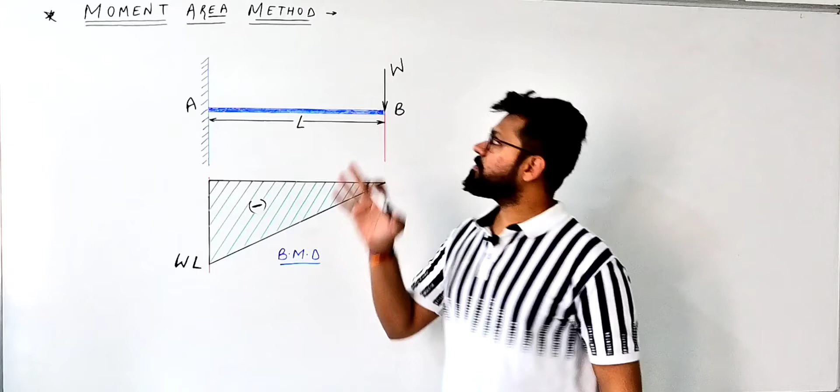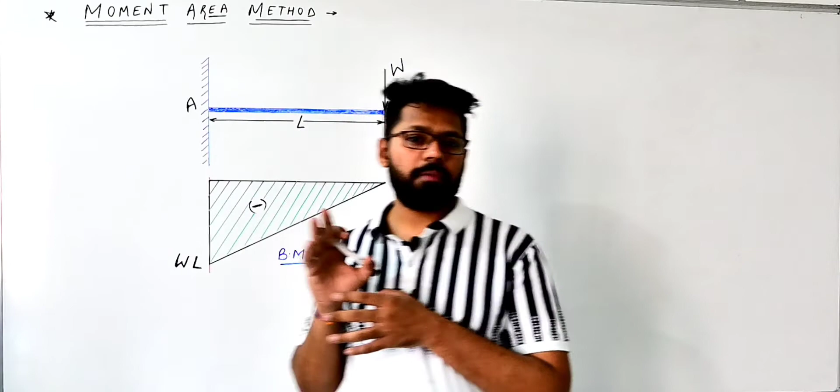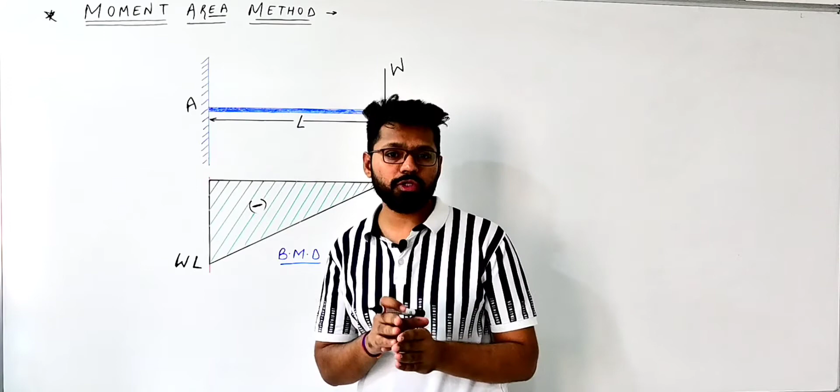I will explain you moment area method, deflection of beams. In deflection of beams, one topic is there, that is moment area method, and this method is very useful to find deflection. Any type of beam, we can find the deflection from moment area method. This is the best method in deflection of beams, and you can approach so many difficult questions from moment area method in an easiest manner.

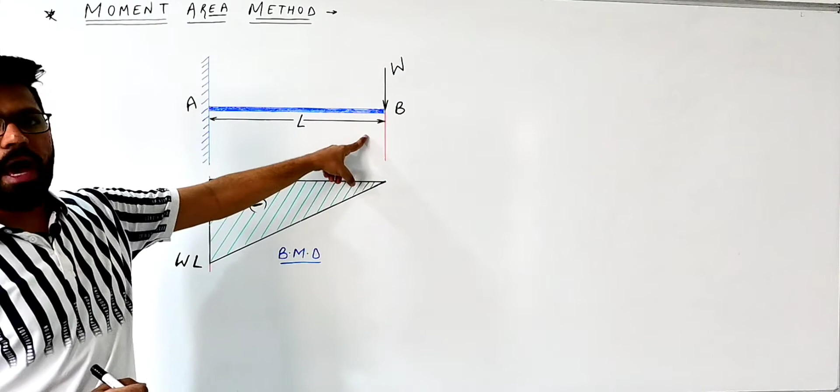Okay students, so we'll start from here. This is our cantilever beam, total span is L, and W is the point load acting at the free end of the cantilever beam. This is cantilever beam which is fixed at one end and free at the other end.

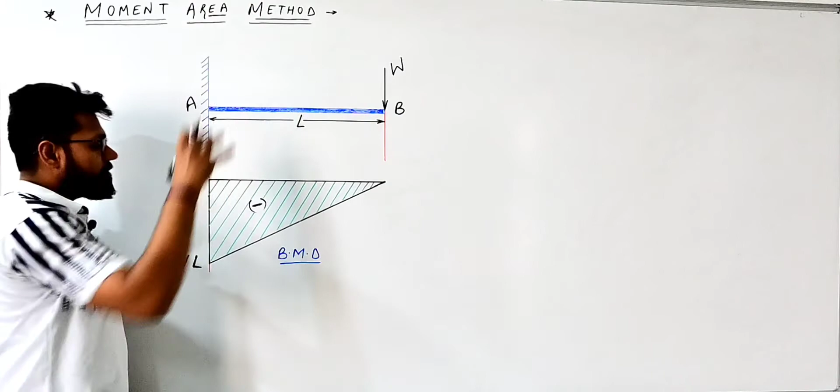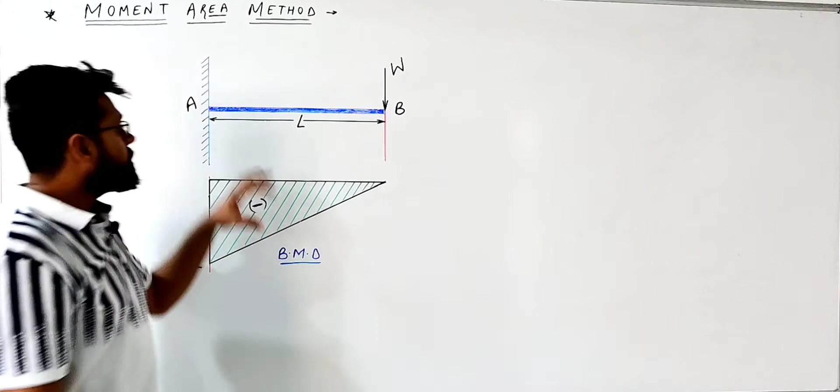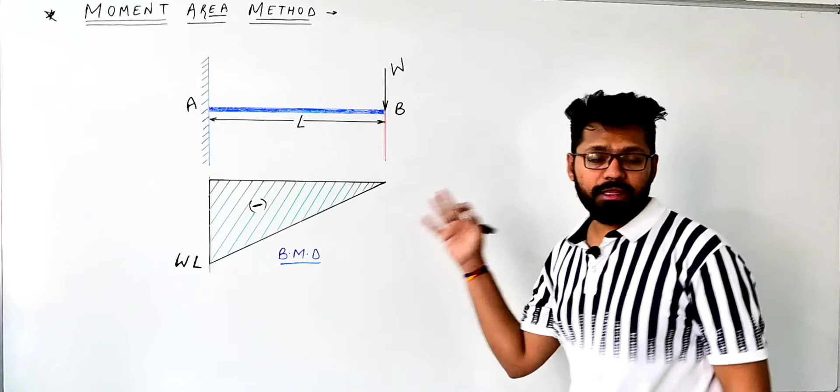So for moment area method, first you have to learn how to draw the bending moment diagram. Bending moment diagram should be must, you have to draw it. Point load is acting at the free end, and this is the bending moment diagram for this beam. These bending moment diagrams I will explain you in the SFD and BMD topic. So this is our bending moment diagram, cantilever beam, point load acting at the free end.

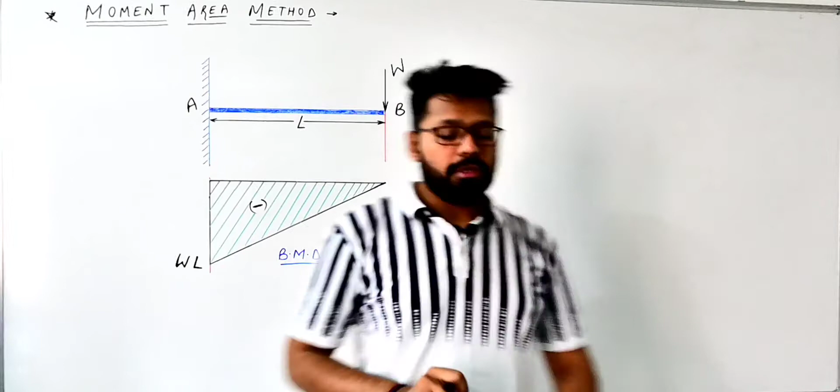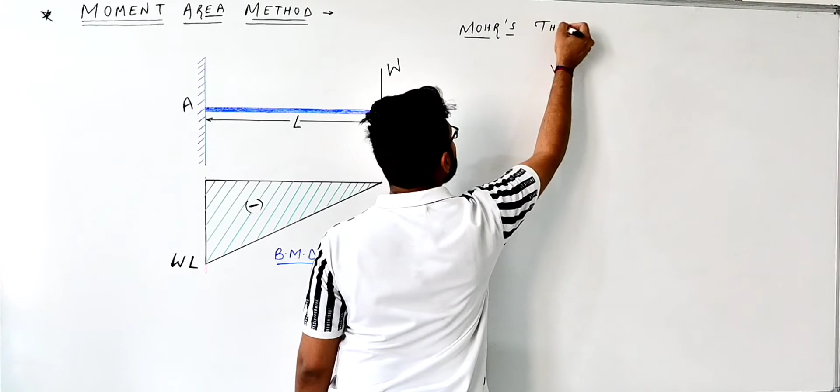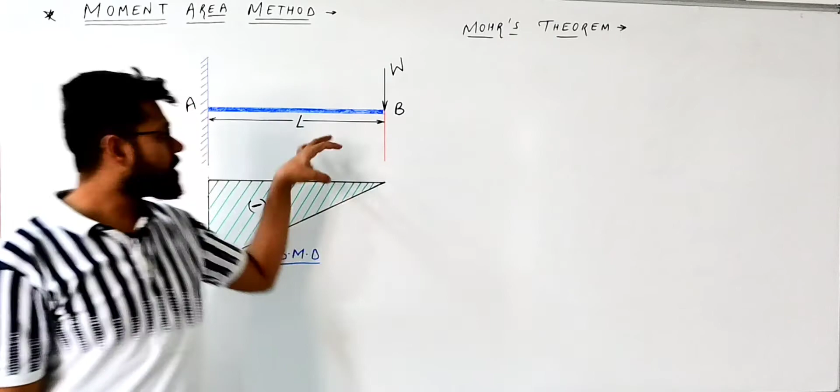So one scientist were there, that is Mohr. Okay, so we will write here Mohr's theorem. With the help of Mohr's theorem we can find the slope and deflection of this beam, and that will be the moment area method.

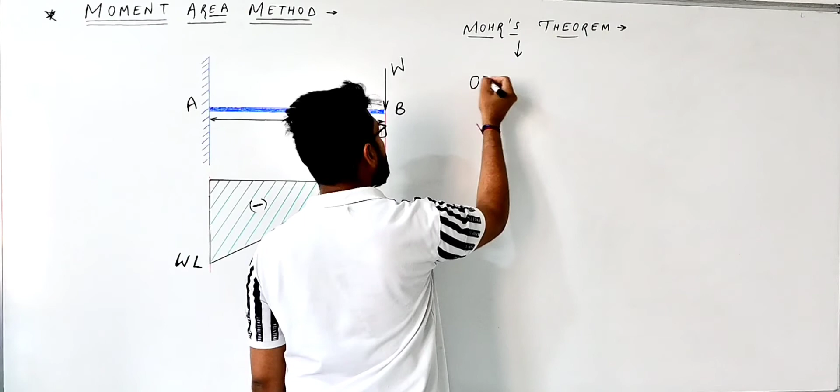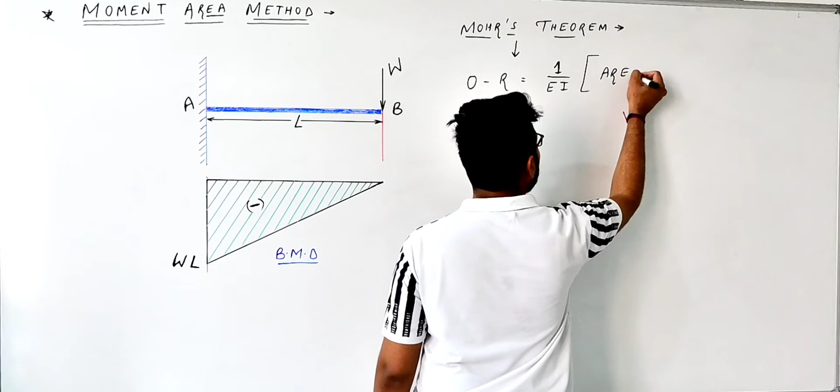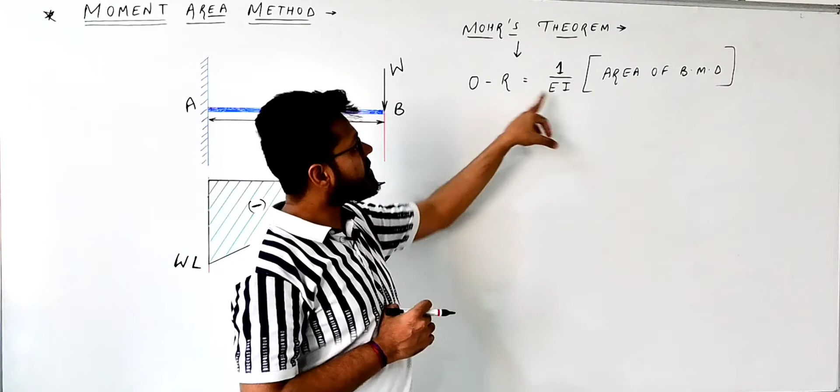Okay, so I will write the theorem here. Theorem is: origin minus reference is equals to 1 by EI area of bending moment diagram. This is the Mohr's theorem, and this theorem is for slope. So we have to write the first equation for slope only. So origin minus reference is equals to 1 by EI area of bending moment diagram.

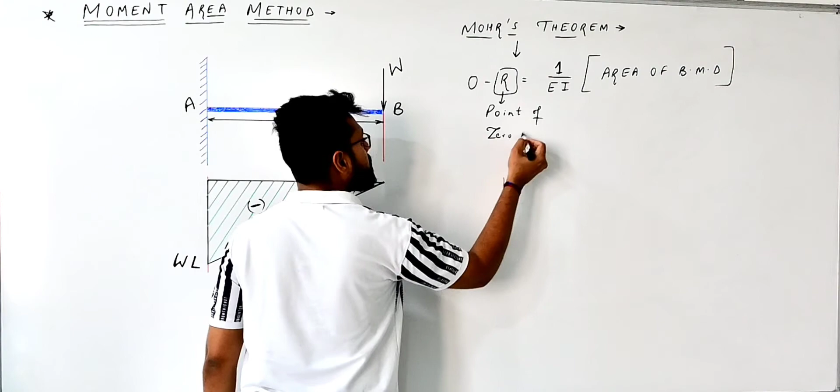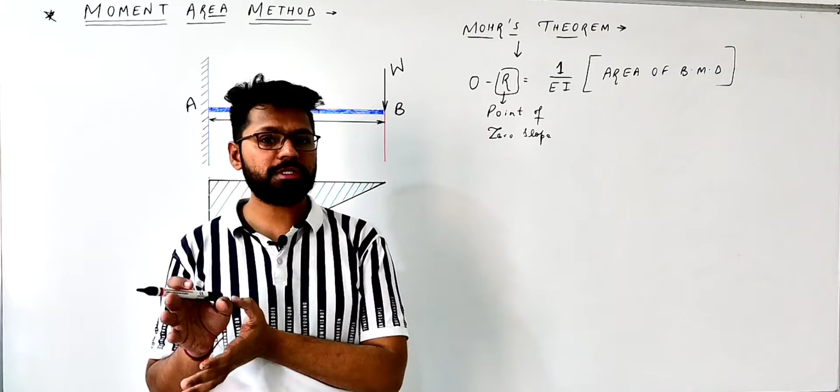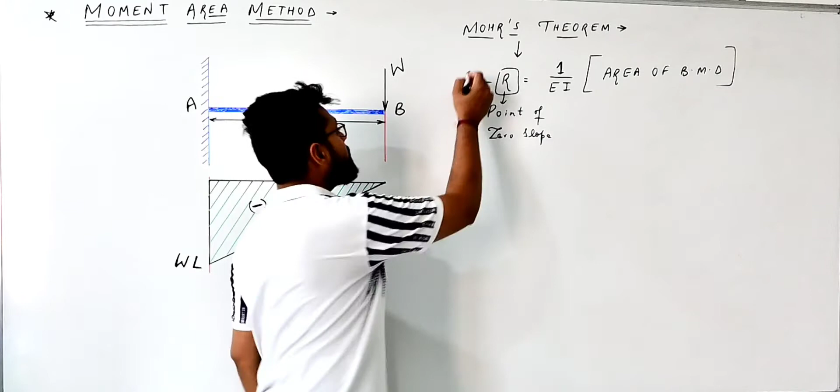And what is the origin and what is the reference? Reference is the point of zero slope. Reference is something zero, so this is the define for slope, so reference is the point where slope is 0. And origin is the point where we have to find the slope, where we have to determine slope.

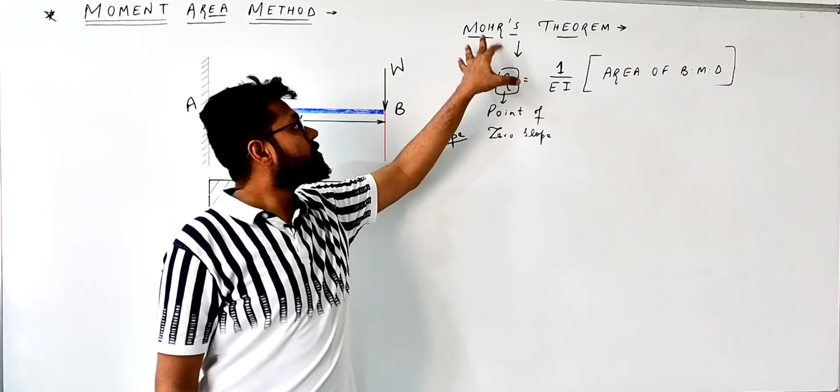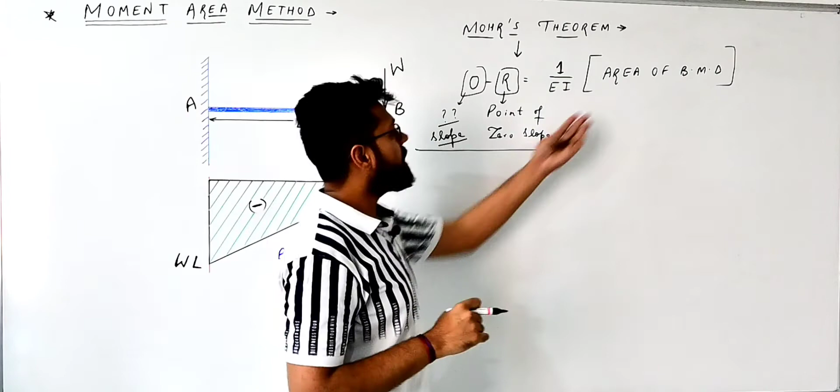Okay students, so this is our Mohr's theorem, and you know Mohr's circle was their topic, that Mohr. So this is the god in strength of materials, and so many subjects were there. So this equation we have to apply: origin minus reference is equals to 1 by EI area of bending moment diagram. So what is origin? Where we have to find the slope, and what is reference? That is slope should be 0 there.

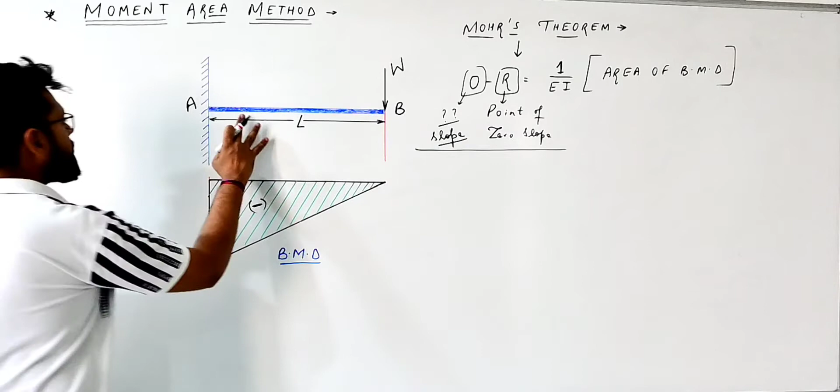Okay, so this is cantilever beam, and what is the boundary conditions of cantilever beam? We all know about boundary conditions. This is our cantilever beam, and point load is acting here. So this is our elastic or deflection curve.

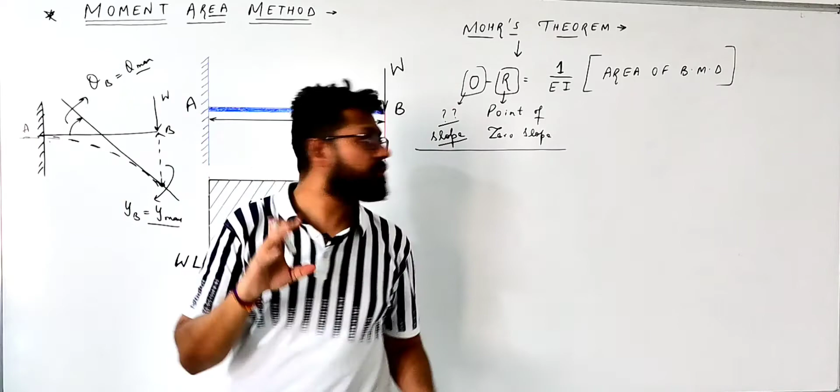So here deflection, this B point and this A point, here deflection is YB is equals to Y maximum, and for slope we have to draw tangent from here, and the slope is also here at B point, this will be also here maximum. So in cantilever beam at free end, what is the condition? At free end deflection should be maximum, and slope should be also maximum.

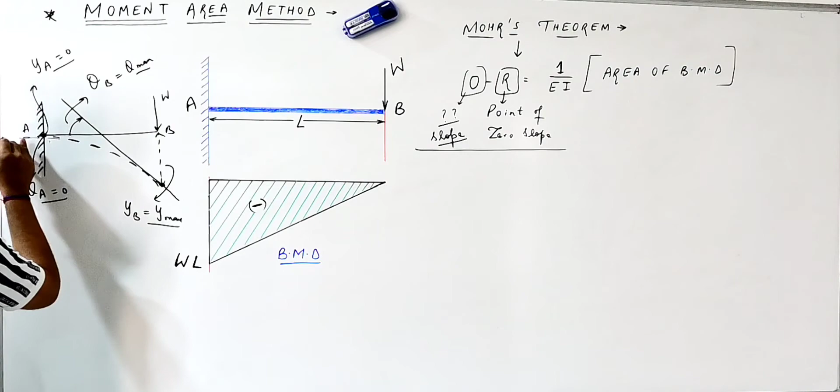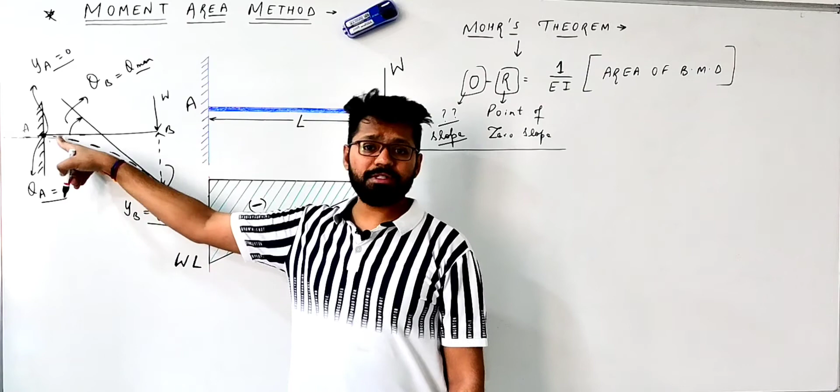And at A point, that is fixed end, here see, here no deflection is there, so here deflection is 0, and slope is also here 0. Because if we will draw the tangent from here, so it doesn't make any angle like that. So here slope and deflection both are 0 at A point, and slope and deflection both are maximum at B point. This is the cantilever boundary conditions. And this curve is known as deflection curve or elastic curve, this curve.

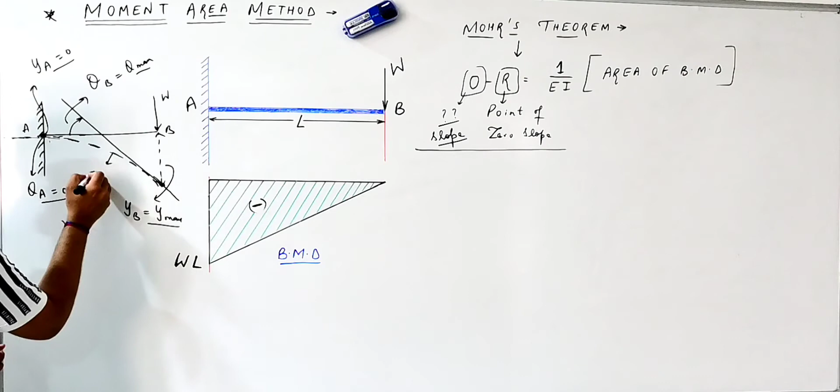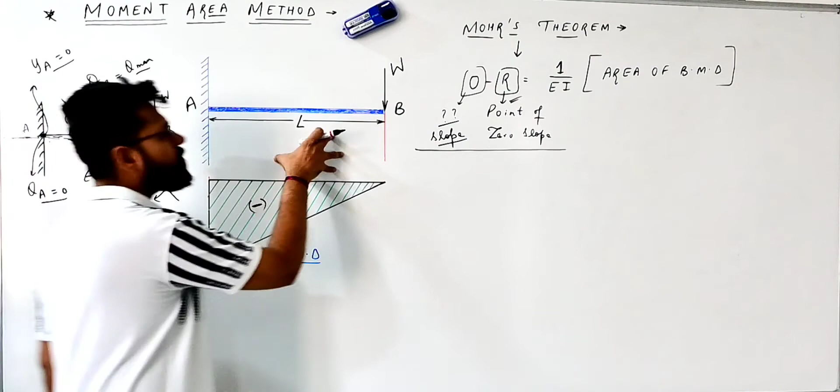Okay, so we will apply here. So we have to find the point where slope is 0. So where slope is 0, at A or B? See here, at A slope is 0, and we have to find maximum slope here. So maximum slope will be at B. Okay, so B point is our origin and A point is our reference.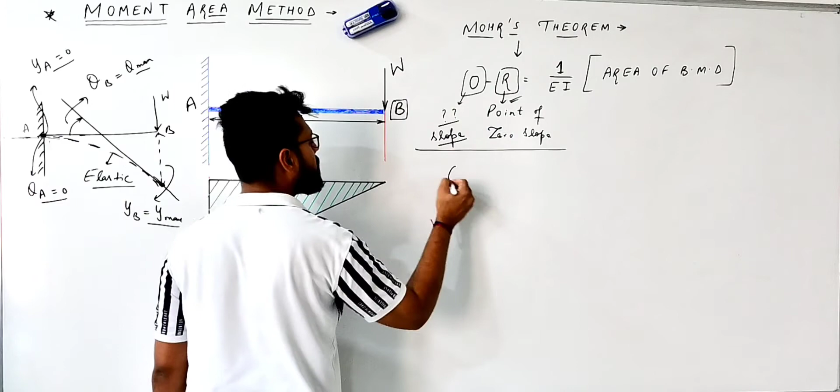So what will be the equation? This equation is for slope, defined for slope. So theta B minus theta A is equals to 1 by EI. And what will be the area? Area should be between A and B.

Between A and B, we have to write the area, so theta B minus theta A. Theta B is the point of maximum slope, that is origin. One subject in mechanical engineering is operation research - remember that subject and you can remember Mohr's theorem easily.

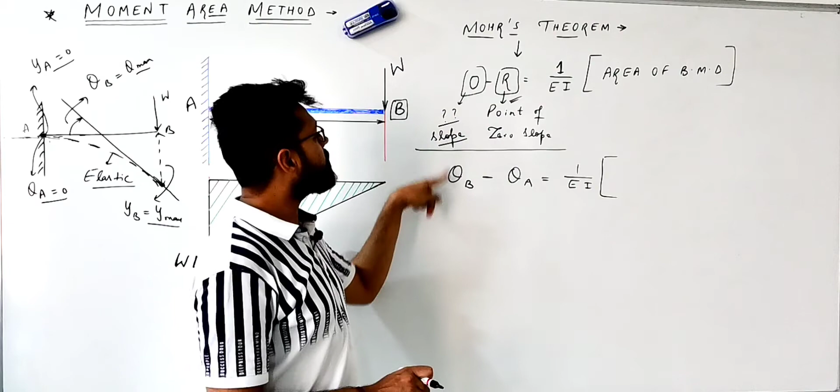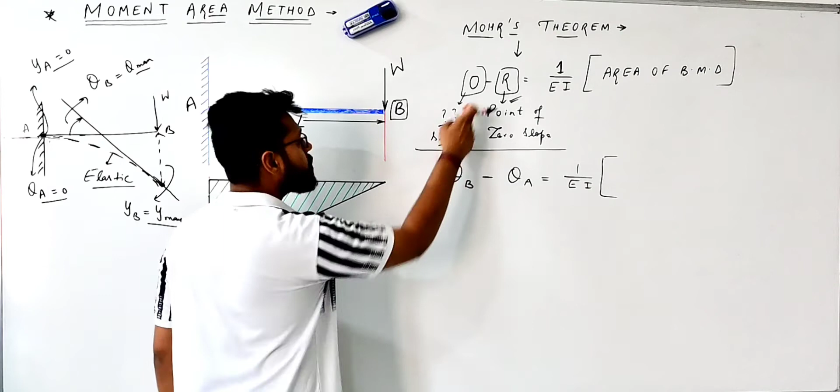So origin minus reference. Origin is the point where we have to find the slope. Reference is the point where slope is 0. Slope is 0 at A point and maximum slope is at B point where we have to find the slope. So origin is theta B and reference is theta A.

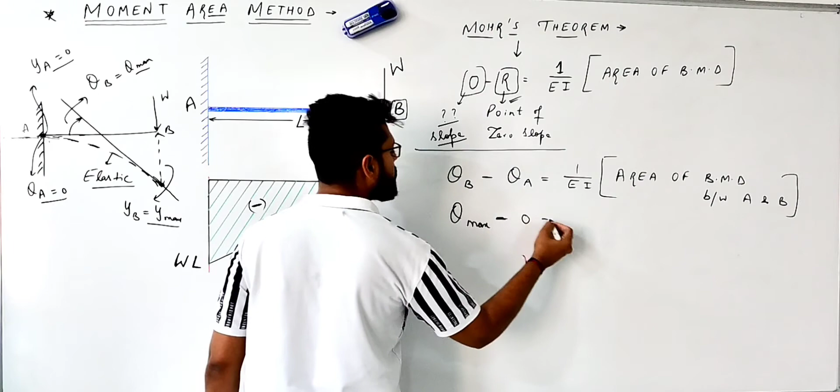This is equals to 1 by EI, area of bending moment diagram between A and B. So theta B minus theta A, theta B is our maximum slope and theta A is our 0, is equals to 1 by EI area. What will be the area of this bending moment diagram between A and B?

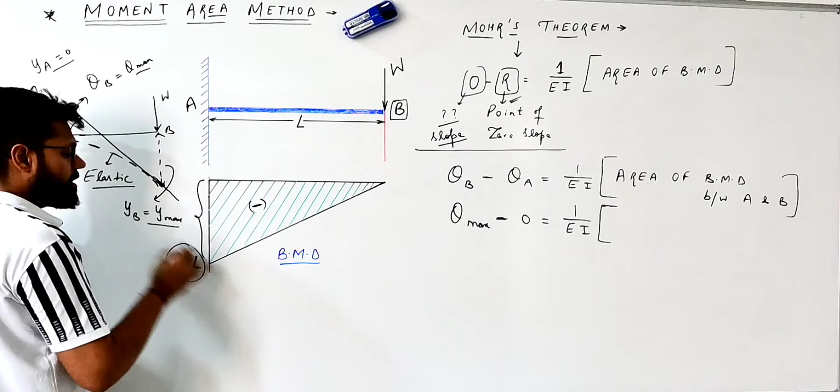This is the triangle, half into base into height. This height is WL, and L is the length. So what will be the area? Area is negative, half into base L into height WL. So from here we will get maximum slope, that will be WL square divided by 2EI. This is our maximum slope. Got it?

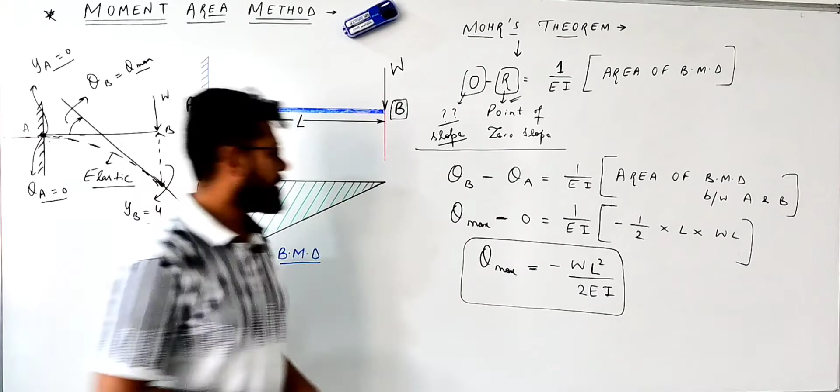Did you understand the Mohr's theorem concept? So this equation is defined for slope, this is the Mohr's theorem, and we have applied it here and determined the maximum slope for this cantilever beam. So maximum slope will be WL square by 2EI.

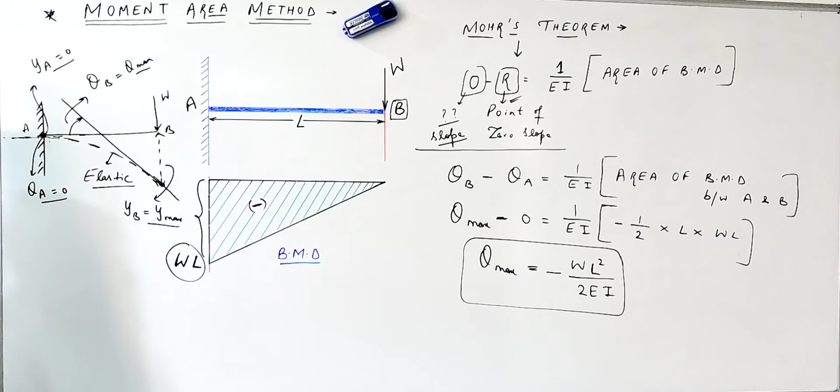Now we are going to find the deflection. What will be the maximum deflection? Maximum deflection also will be at B point. So now we are going to find the deflection. See here.

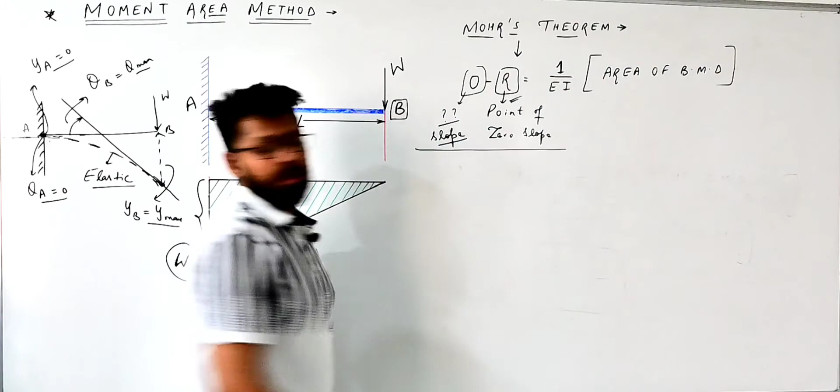Same equation will be repeated for deflection. You have to write the equation for slope, and the same equation will be repeated for deflection. So we will write the same equation. What was the equation? Theta B minus theta A, origin minus reference. Same equation will be repeated for deflection: YB minus YA is equals to...

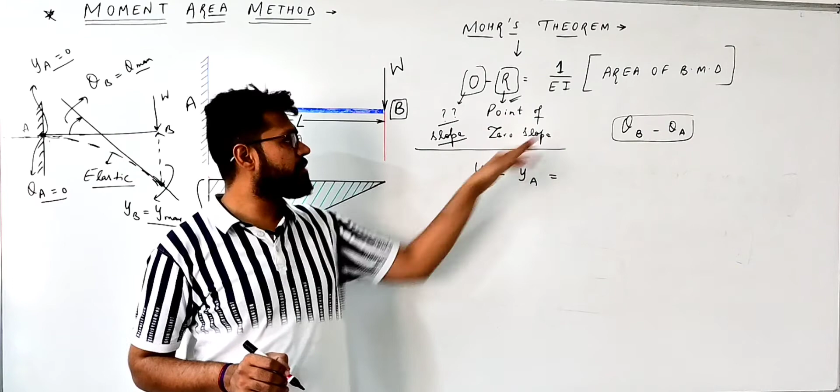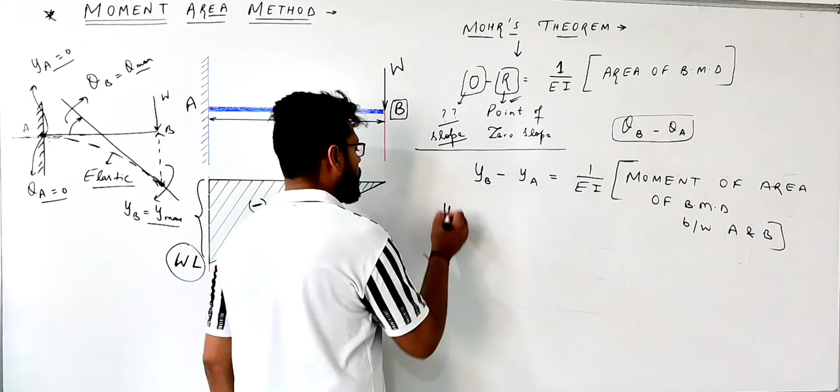Don't apply origin and reference in deflection. Write the equation for slope, and the same equation will be repeated here for deflection. YB minus YA is equals to 1 by EI, that is moment of area of bending moment diagram between A and B. So YB minus YA is equals to 1 by EI, that will be A times X bar.

This is our theorem. So YB is Y maximum and that is 0, is equals to 1 by EI. What will be the area? Area will be half into base into height, minus 1 by 2 L into WL. Okay, and multiply by what is X bar? This X bar is a very important term and there is a lot of confusion.

So many students have a lot of confusion in x bar, and they always apply the wrong concept in this. So listen, what is x bar? This is the centroid of the bending moment diagram.

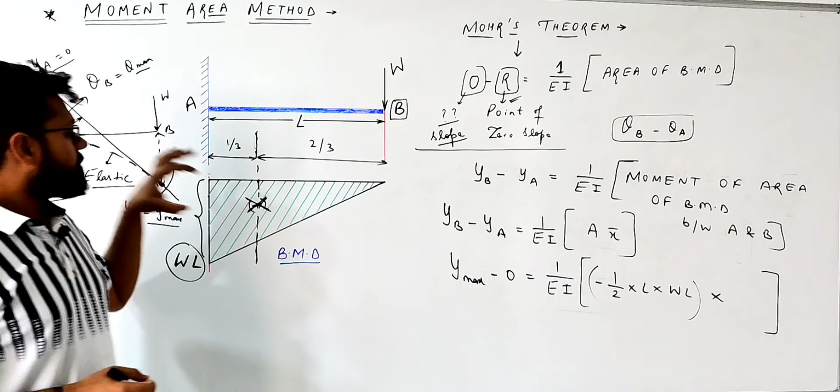Centroid of the triangle lies at, from base it should be at a distance of 1/3, and from vertex it should be at a distance of 2/3. Where the centroid lies at triangle centroid - from base it should be at 1/3 and from vertex it should be at 2/3. So this is 2/3 L and this is 1/3 L. Total span is L. So this is 1/3 L, this is 2/3 L. This is the centroid of the triangle.

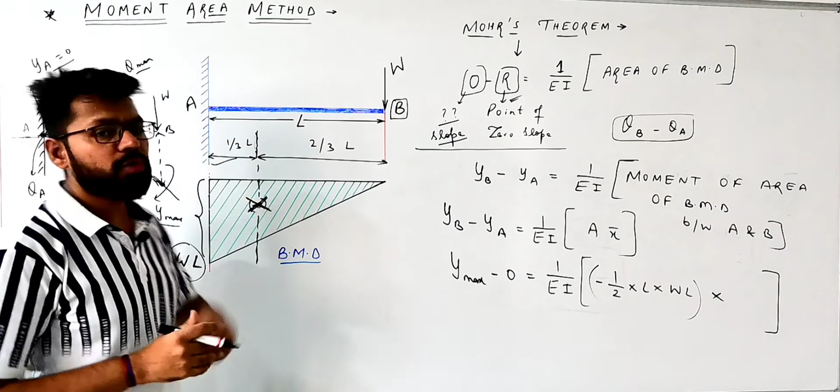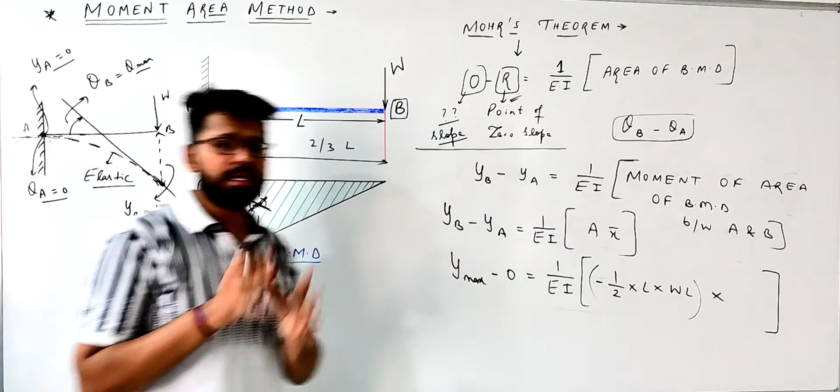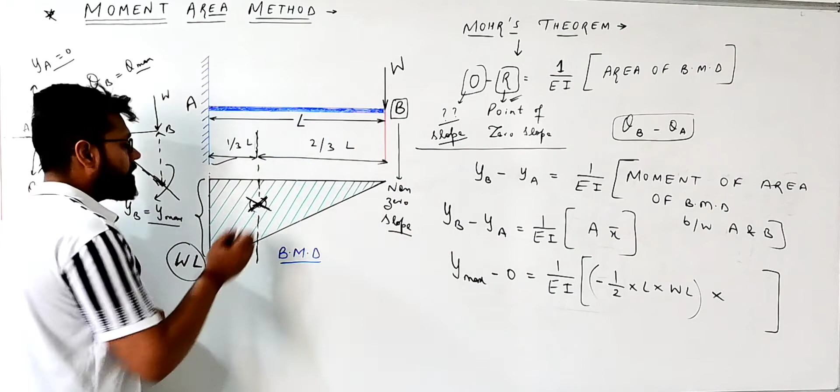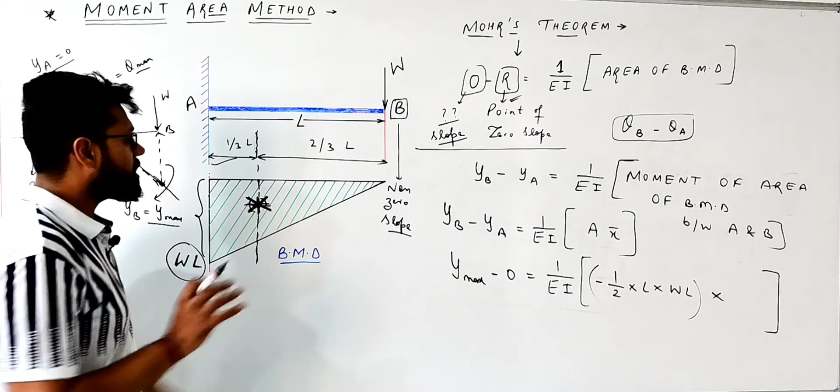Where do we have to take this distance? This distance should be taken from the point where slope is non-zero. X bar is the distance measured from the point of non-zero slope, and this point is having non-zero slope. So where is the slope non-zero? The slope is non-zero at B point. So x bar should be measured from B point, up to the place where the centroid of the triangle lies. So centroid of the triangle is at 2/3 L. So x bar is the distance measured from the point of non-zero slope to the centroid of the bending moment diagram.

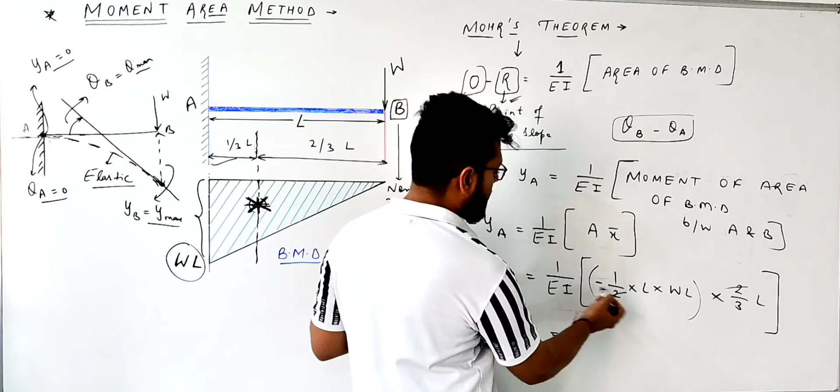So what will be the x bar? 2/3 L. So y max is equals to minus WL square by 2, cancel. So what will be it? Minus WL cube divided by 3EI. This is our deflection. Got it?

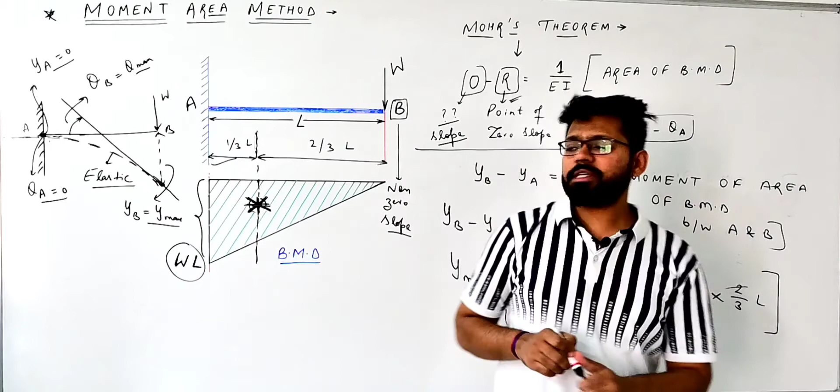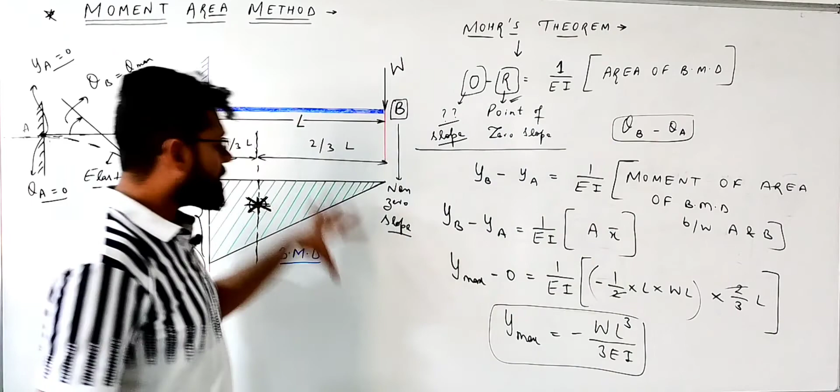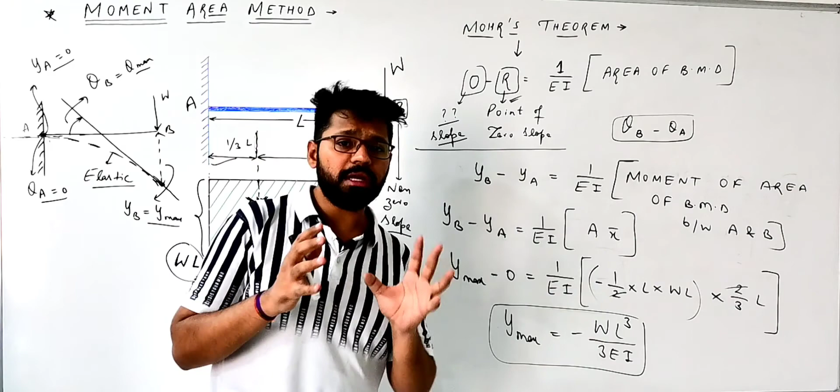So this is a very simple example, because first we have to cover the basic approach. Our basic should be very strong, then we will move further on. So this is the basic approach - what is the moment area method, how to deal with Mohr's theorem, how to apply Mohr's theorem, what is the basic idea about moment area method - that I have covered in this topic. Got it?